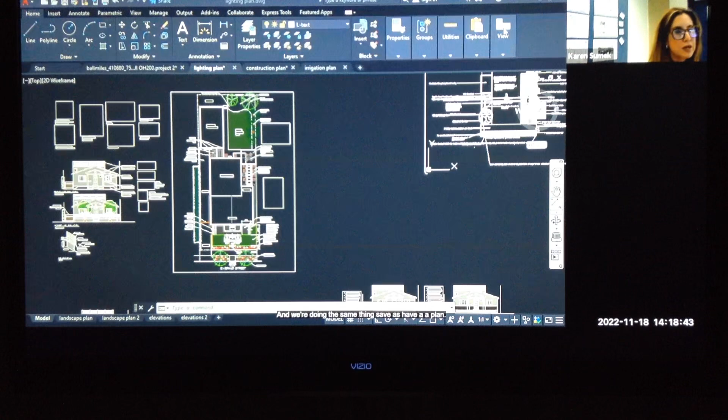Okay, so we're back to, this is the lighting plan, and we're doing the same thing, a save as, have a plan, and in this plan, again, we don't need any of this information, the hardscape, call-outs, the dimensions, any of that. Don't really even need to call out any of that information in here.

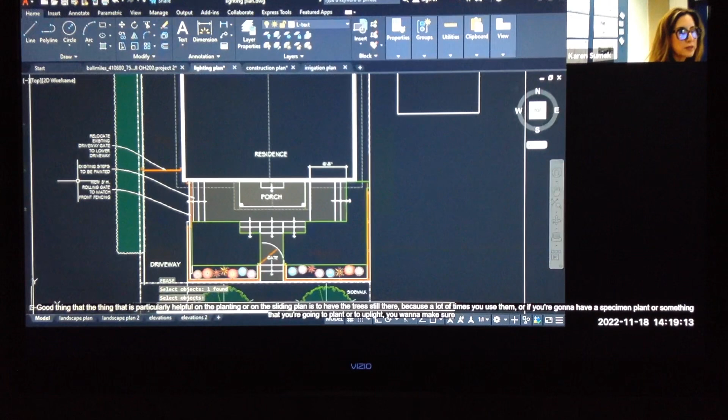The thing that is particularly helpful on the lighting plan is to have the trees still there, because a lot of times you use them, or if you're going to have a specimen plant or something that you're going to uplight, you want to make sure that you have it located on the plan. So all of these, probably not so necessary to show on the plan, can be complicated, but the trees are more important.

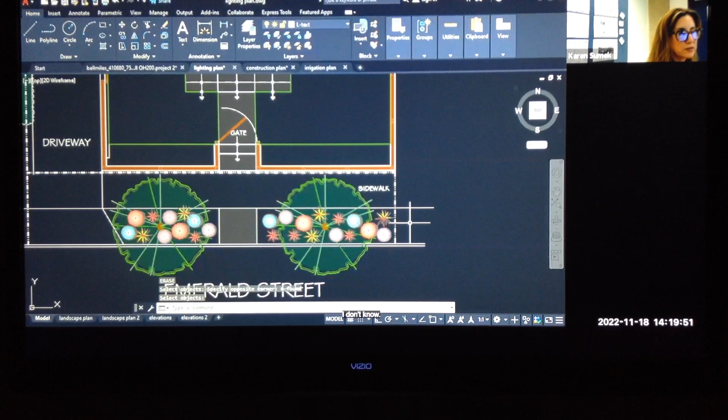So let's pick some light fixtures, and the company that I use is FX Luminaire. They're a local company, and so it's fxl.com. They're owned by Hunter now. But there are lots of other companies as well. This is just one I like. A lot of people like Vista or Aurora. You can get specific pictures from other companies, but this is nice and all around helpful.

So there are different ways that you want to design your landscape lighting, and the lighting is going to be aesthetically pleasing, but it also needs to serve the purpose of helping people navigate around the site safely, walking-wise, but also security-wise. So it's helpful to be able to see the portions of your yard without blasting a security spot beam at the yard.

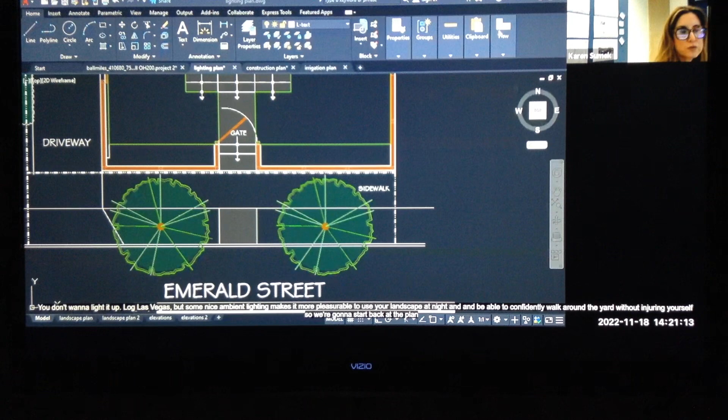It's kind of nice to be able to see what's going on back there in a little more subtle way. And with lighting, less is always more, so you don't want to light it up like Las Vegas, but some nice ambient lighting makes it more pleasurable to use your landscape at night and be able to confidently walk around the yard without injuring yourself. So we're going to start back at the plan and think about design-wise how we want the lighting to occur.

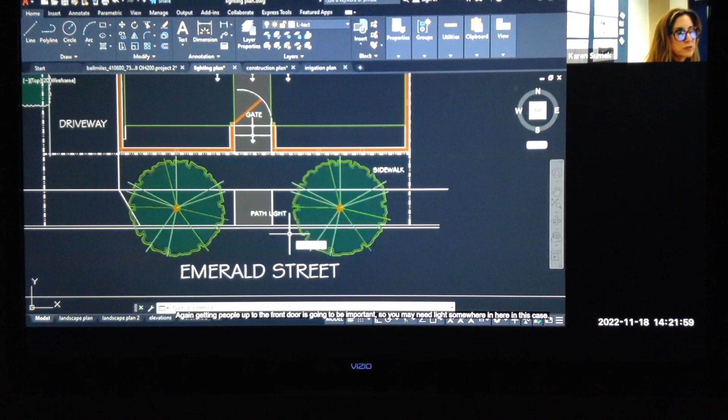So we have our design, and we have an entry walkway. So right here, I'm just going to maybe write some notes as we go. I would like to have path lights here because this walkway is going to be a way to get into the house. So that's your entry walkway. So you need to make sure you have some lighting in here. Again, getting people up to the front door is going to be important. So you may need a light somewhere in here.

In this case, it's going to be a little more challenging because it's in a lawn area. So the path light's the light that just kind of sticks up out of the ground, and it might get damaged. So I'm going to move that maybe over this way. So we have a couple of path lights here. And so those are our basic security lights, but we also have these steps. So inside steps, we do something called step lights.

So we're sticking with the front for the moment, but we'll need step lights around for our steps. And now we have path lights, so now we have secure walkways, right? So we have some lighting that we can get around the site and feel comfortable. We have a couple of trees. It'd be kind of nice to uplight those or downlight them.

So if you're in an area where we're concerned about light pollution, you would want to do maybe downlights, which is something that you would hang in a tree, and they kind of cast shadows down. So we have some little ones that are literally hung from the tree, and these could be mounted on a bracket that's on the trunk of the tree. Or you can do an uplight that casts light into the tree canopy.

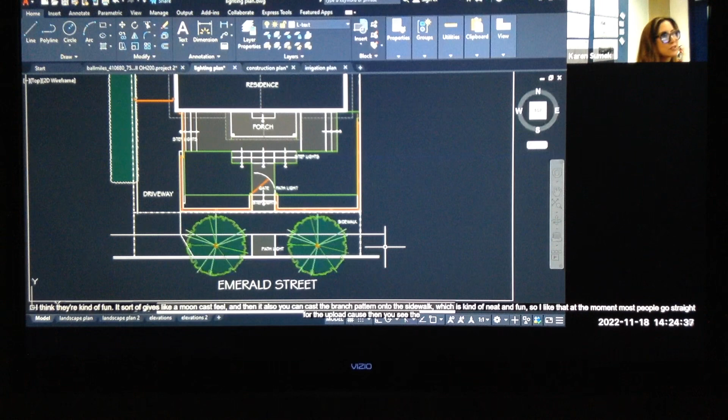So those are more of a different style. So I'm enjoying the downlights. I think they're kind of fun. It sort of gives like a moon cast feel, and then you can also cast the branch pattern onto the sidewalk, which is kind of neat and fun. So I like that at the moment. Most people go straight for the uplight because then you see.

Would you put downlights like that on the public street? I'm kind of afraid of theft. Yeah, I mean, I guess if you're afraid somebody's going to steal them, maybe. I would put them in there, but I'm maybe not as concerned about that. Maybe not copper ones. Maybe just some that aren't so outwardly obvious.

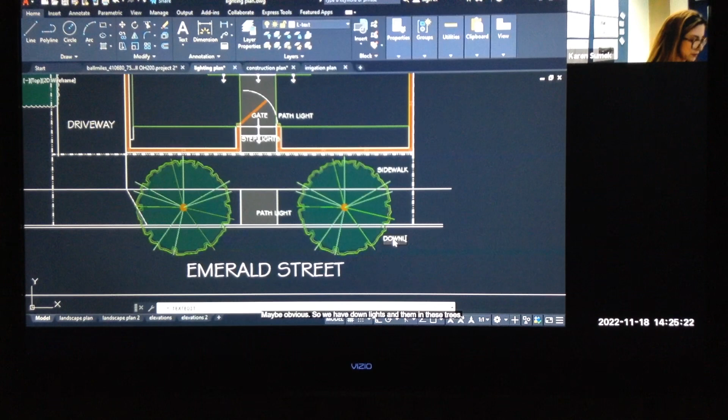So these will cast light onto a wall. And a way that you can find out more about each of these fixtures, because there's so many of them, it's a little hard to tell what exactly they're about. But what you can do is go into the product information for these. So let's say we're going to do just an uplight.

Karen, on your screen share? Yeah. I'm not seeing that. I'm seeing your drawing. Thank you for letting me know that. Let me see. Yeah, okay. Is that better?

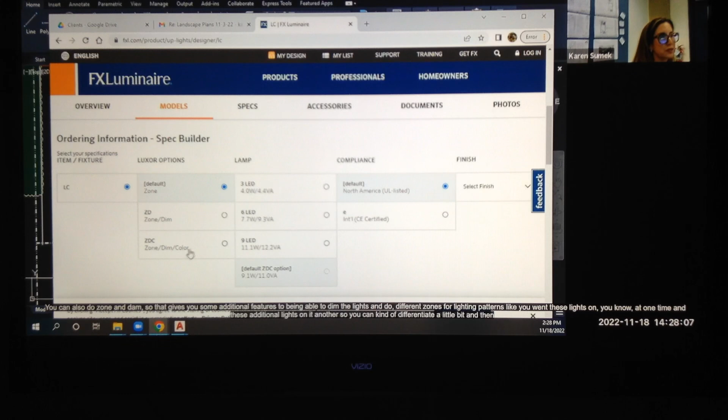In this series, you can do just a basic light, so it's just on or off. You can also do zone and dim. So that gives you some additional features of being able to dim the lights and do different zones for lighting patterns. Like you want these lights on at one time and these additional lights on at another. So you can kind of differentiate a little bit. And then there's the ZDC, which also adds color to your lights. And so the transformer is specified for zone, dim, and color, and the fixture is also for zone, dim, and color. So you want to make sure you add that in.

So we have our LC, which is the fixture number. You can choose which of these you want and decide the strength of the LED. We do North American compliant, and then you can choose a fixture finish. So they have lots of different colors, and you can match that to whatever's going on in your design.

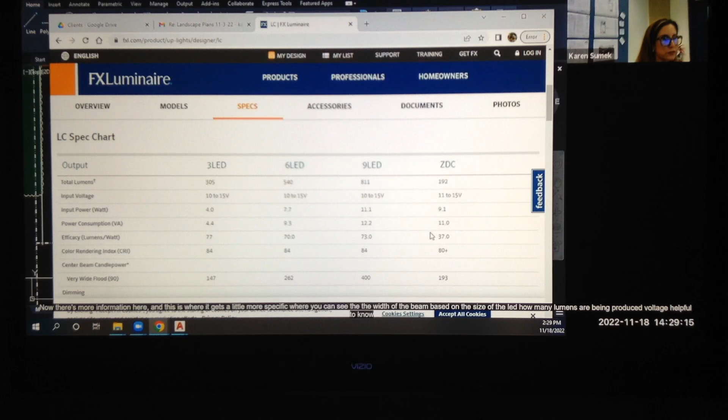Now, there's more information here, and this is where it gets a little more specific, where you can see the width of the beam based on the size of the LED, how many lumens are being produced, voltage, helpful to know, our zone, and then our kind of length of life for the fixture. Actual specifics of the size.

And now this is something that is different to lighting, and it's similar to spray irrigation, and it shows you how the foot candles project away from the distance of the fixture itself. So let's say you want there to be about 1 foot candle of strength coming to the object that you're trying to light. So at the fixture itself, it's the brightest. As it moves further away, it gets darker.

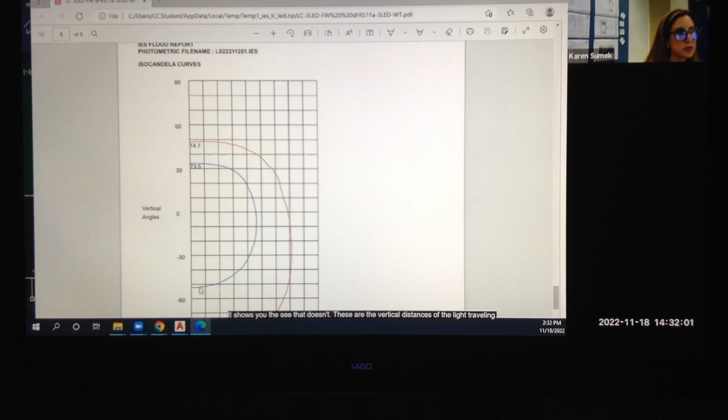They have specifications, and this is really more information than we need, but it shows you the... that doesn't. These are the vertical distances of the light traveling, but what I was looking for was just a basic photometric. I'll try it on a different product and see if I can find that. It just shows the distance of the light and the strength of the light going away from the object. And I'm not sure what this is for. It might be on something different.

We'll move along from that, but let's say you want to have about 1 foot candle coverage, and then it's going to get lighter and darker as you go throughout the site. So you want some coverage, but it doesn't all have to be super bright. And it doesn't have to be even or consistent. So you are continuing to design your way through the site where you have some lights and some darks.

Let's go to the path lights. And you can pick a fixture that you like. Again, I tend to go with the LED. So let's take a look at that. Again, the strength, the finishes, it's copper. It's 14 inches high. You can go in and do the models, and all of these selections as well. Specifications, the foot candles.

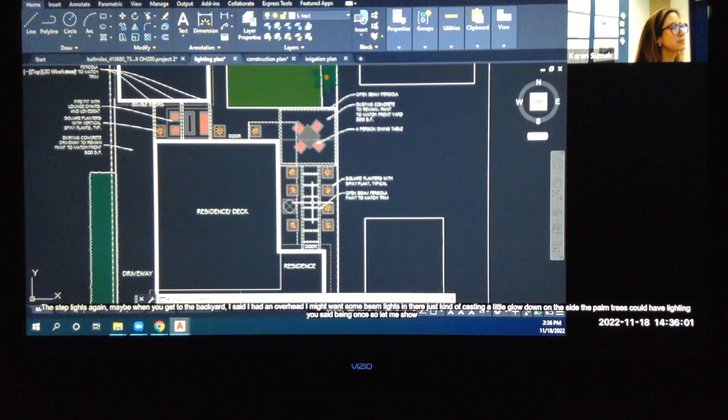So I want step lights. I can have step lights here. I probably need a path light here, so when you open the gate, you can see where you're stepping. I want some down lights in the tree. I want a path light here. The step lights again. Maybe when you get to the backyard, I said I had an overhead. I might want some beam lights in there, just kind of casting a little glow down on the site. The palm trees could have lighting. Is it beam lights? So let me show you those.

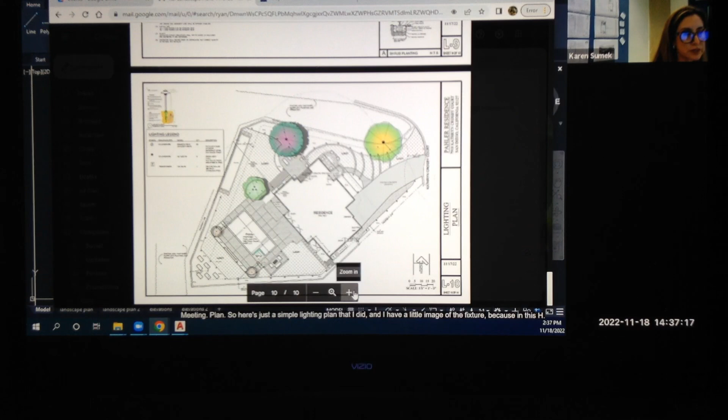We have a lighting plan. So here's just a simple lighting plan that I did. And I have a little image of the fixture because in this HOA they tend to care, but the client also cares what fixture you chose for the path lights. They tend to have the most personality. And then I have a lighting legend, and that shows a symbol. And again, you're free to make up symbols for those. You don't want them to be huge. Kind of small is nice. The manufacturer, the model you chose.

So that's back to this. So let's say you have an NL. You want it to be the super exciting one. So it's now only the 9 choice. We want it to be just down light. And we'll choose an antique bronze finish. Here's our ordering number. So it kind of created it for you. So that is your model number, and it gives them all the information they need to order that product.

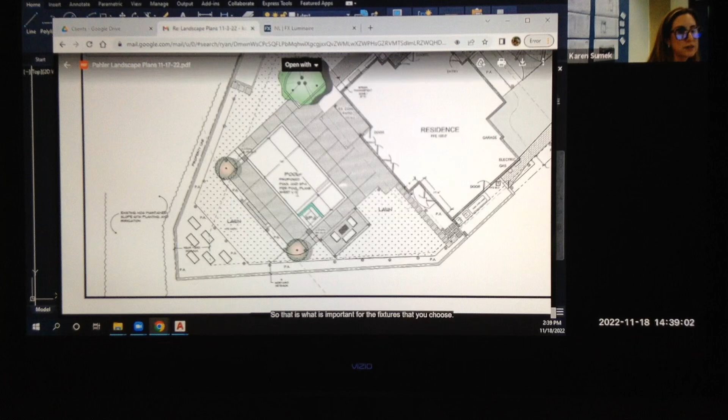On this website, you can kind of do a little shopping list too, but for our purposes, we can just put that right here as the model number. Give a quantity, and then just describe what it is. And that's back to the FX Luminaire. This is an NL down light. And wall mount, you can describe that in your legend. So that is what is important for the fixtures that you choose. The transformer is another item that should be included on the plan because you want to show where that transformer goes. So we'll go here.

And the Luxor is the one that has the app and the lighting and the color and the zone and dimming. The other ones have less of those features, which is fine for most of my clients. Most don't really need pink and blue lights in their yards, but some really like it. So you have some different options. There's a wattage amount. The 150 to 300; 300 is generally more than enough for any of the landscapes that I've done.

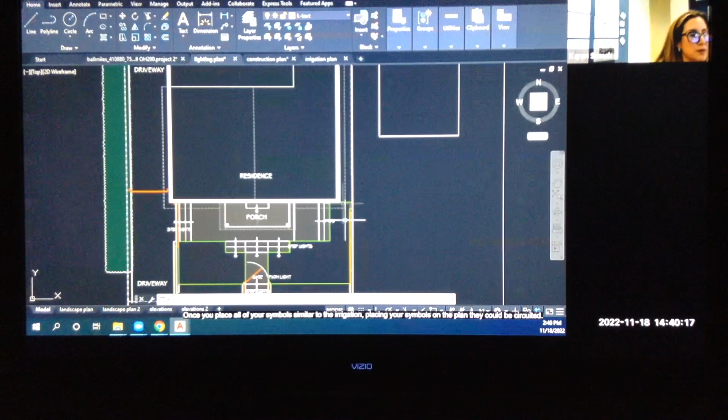And so each of those circuits would go into a transformer. So once you place all of your symbols, similar to the irrigation, placing your symbols on the plan, they could be circuited, but I don't necessarily do that on these plans. But you could show a circuit. So these two trees would be on one. The path lights could be on another. The step lights could be on another. So you could put them on by symbols or uses or areas.

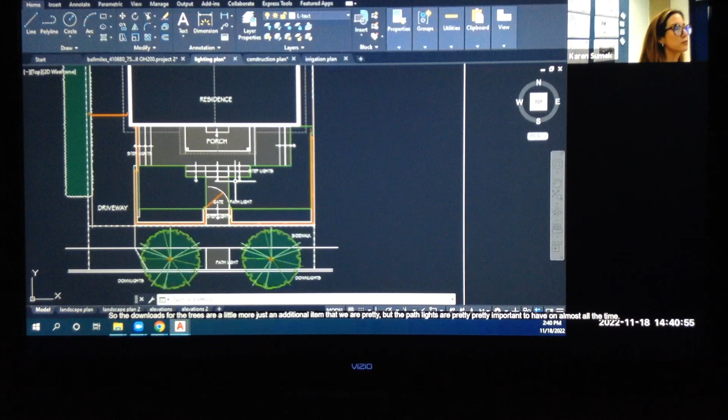So the downlights for the trees are a little more just an additional item. But the path lights are pretty important to have on almost all the time. You have the landscape lighting on, the step lights and the path lights. The others could be turned on and off, so they could be on their own circuit. Think a little bit like the irrigation plan.

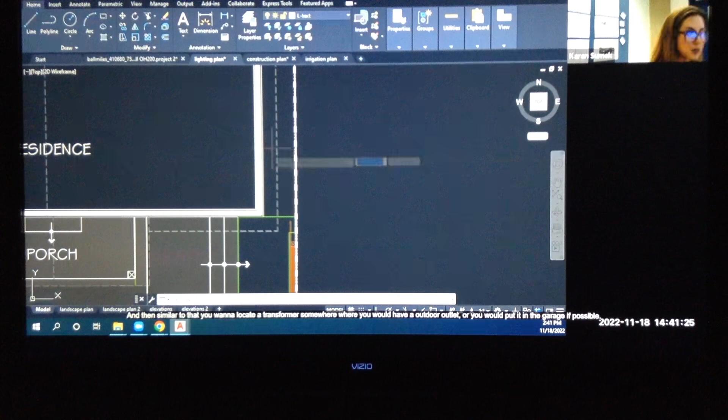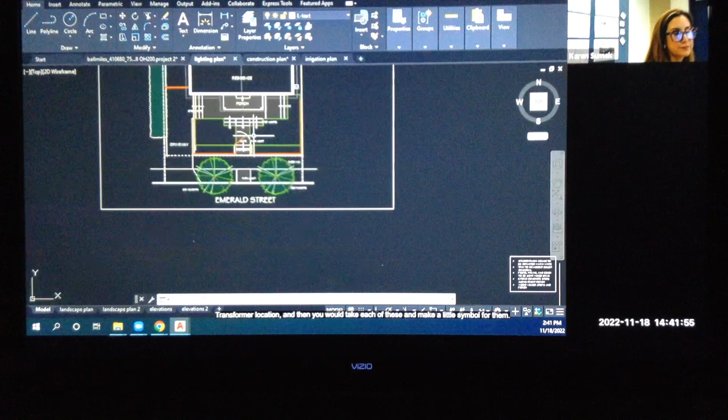And then similar to that, you want to locate a transformer somewhere where you would have an outdoor outlet, or you would put it in the garage if possible. So that's just if you have access to being able to put it in the garage or not. Transformer location, and then you would take each of these and make a little symbol for them. Again, the layers. New layer would be LL, so landscape lighting, uplight, or you could just do fixtures all alone. And set current, and then you'd make your symbols and set them on the plan.

And like I did on this plan, I showed some images of what the fixture looks like. Sometimes that's helpful. HOAs tend to like that, so they can get an idea if you're within their design standards. So it's helpful for everybody to just do a little PDF. Anything you can just plop in there and show what the fixture looks like on the plan itself. Do you guys have any questions about that?

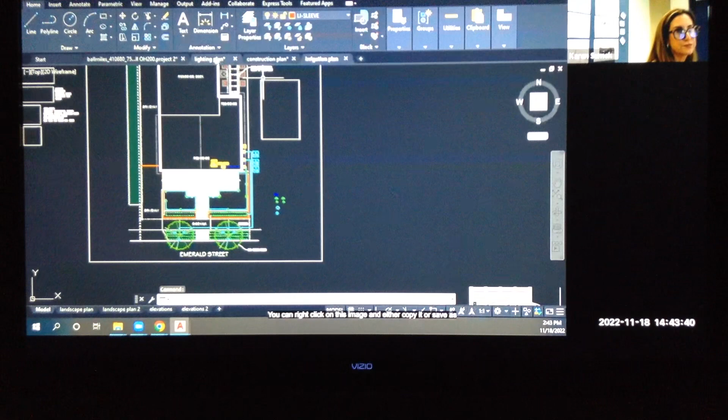You want the image on the plan like you did with the... Yeah, you can do that. That's something that I have done for sure. Right, so you're going to do it on your own computer, and then you send me a PDF. Let's say you have a picture that you want to use. You can right-click on this image and either copy it or save as. There it is. Scale it down and put it on your plan and write a little description of what it is underneath.

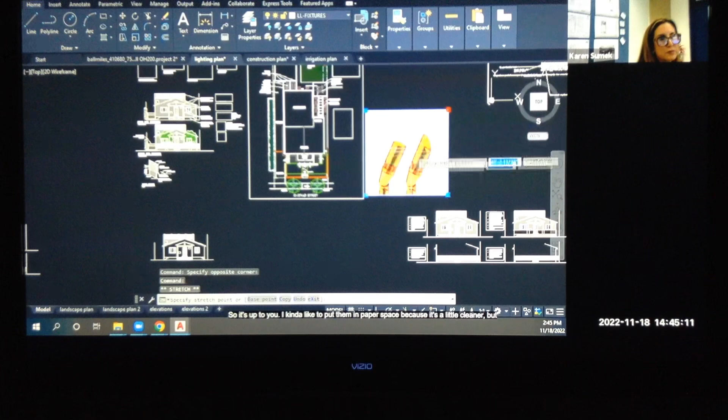You have to turn on that view for it. No. So I'm in paper space right now, and I copied it off the internet, and then just did Control V, and that popped it in. So right click, copy image, going back to my lighting plan. I'm in paper space, and then I'm doing Control V and placing it. You can do the same thing in Model Space. So it's up to you. I kind of like to put them in paper space because it's a little cleaner, but whichever way makes more sense to you is probably going to be what you end up using.

Yeah, that's kind of what I mentioned with the circuitry. So if you wanted to do wires to connect them, you would do your symbols, and then on these plans, they're always arced. So you're connecting, let's say, those two together because we just talked about maybe they should be on their own circuit, so it could be turned on and off. So then you would draw another one, and again, arc, and it comes and meets the transformer. So then we have one here.

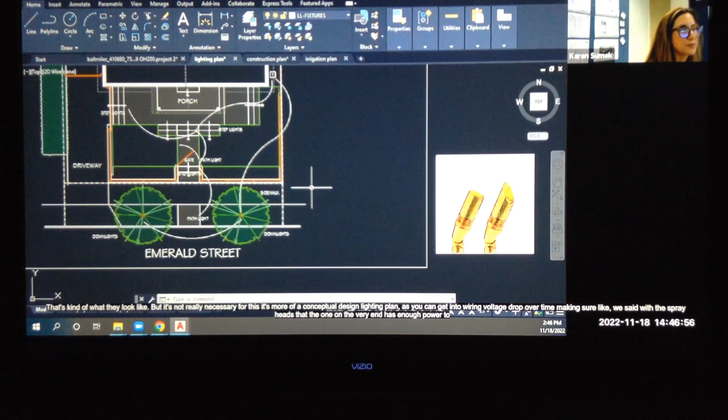And in this case, we would need another sleeve for that. We need these. You kind of just arc them back and forth. That's kind of typical symbols for this. No, but just so you have an idea of what you're looking at when you see one in the future, that's kind of what they look like. But it's not really necessary for this. It's more of a conceptual design lighting plan.

Because you can get into wiring, voltage drop over time, making sure, like we said with the spray heads, that the one on the very end has enough power to operate. Same works for lighting. If you have a light that's really far away from the transformer, you may need to change the wiring to make that as bright as the others along the line. Okay. Are we good with that?